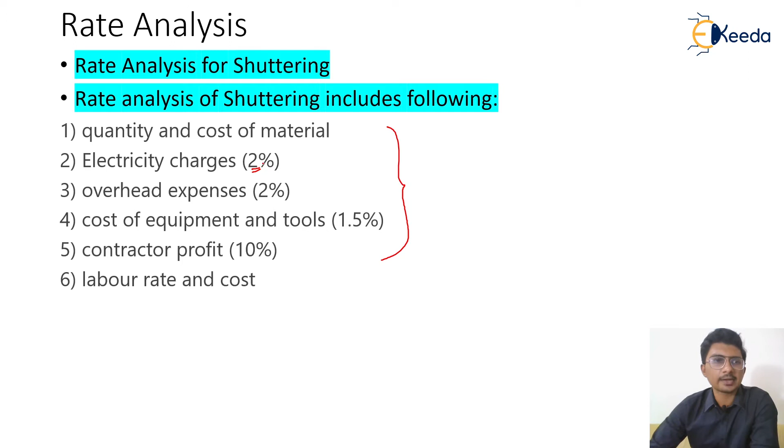Only into this shuttering one I have added the electricity charges as 2%. The water charges are not there, but we need electricity for the cutting of the battens, cutting of the plies, and a lot of cutting is there when it is about the shuttering. So for that I have added the electricity charges instead of the water charges by 0.5%. So this is what we are going to calculate for this rate analysis of the shuttering.

So now let's consider the problem statement. We have to calculate the rate analysis for the 10 meter square area of the formwork. And before starting this rate analysis, we should know what exactly the repetitions are and why more emphasis is always put on them when it is about the shuttering. The repetition is another very important topic to have in hand.

So what is that? Whenever you purchase a ply, of wood, or it might be of steel MS plates or anything, they always have the capacity that you can use them once, twice, thrice, and at least 4 to 5 times is the repetition life. So the repetition life obviously depends upon the usage you are going to have. If you are using it for heavy and hefty works, and the workmanship is not good, the repetition is obviously

going to get deteriorated. But if usage is nice, the proper application of the oil has been given, during the de-shuttering process it has been properly de-shuttered, and they are stacked in a proper way, whatever nails there are are taken out in a proper way, and the battens are separated and rearranged in a proper way. So if good workmanship is there, then the repetitions of any formwork can increase many times. But if the workmanship is poor, it can reduce to 50% or even 75% based on the workmanship.

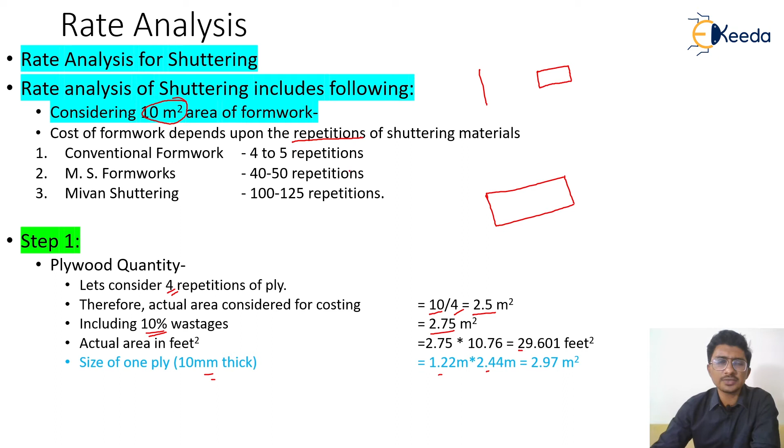Okay, and just for your knowledge, the size of one ply is 10 mm thick, which is 1.2 by 2.4 m, 1.22 by 2.44. That nearly goes to 2.97 meter square. Just for your understanding, we are not going to need this value for the calculations.

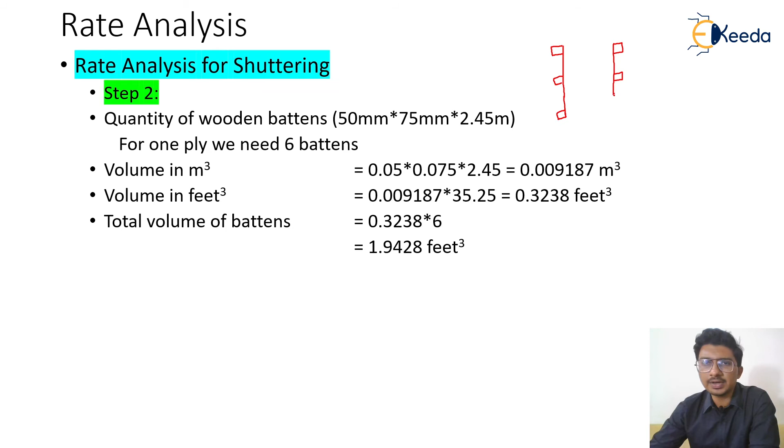The next one is the calculation of the wooden battens. Now, what are the wooden battens? Suppose this is the beam I'm going to cast, and there has to be some support that I need to give to the beam based on its depth. So these are the battens which are made up of wood, and they are measured in quantity and volume. The wooden battens are 50 mm by 75 mm by 2.45 meter.

This is a wooden block, you can say, which is of this height, that is 50 mm by 75 mm, and this length is nearly 2.45 meter. That is quite long. Around 2 by 3 inch and 8 feet, they are having this length. So now for one ply we need 6 battens. As I have told you, to fix one whole ply we need to have 6 battens.

So their volume, if we want to calculate in meter cube, we get this 50 mm by 75 mm by 2.45 meter. Then if you want to convert into feet cube, we have a multiplier we have been using for long, 35.25. Value comes to be 0.3238 feet cube. So now we are going to need the 6 battens, so that's why we are going to multiply the value by 6. The value comes out to be 1.9428.

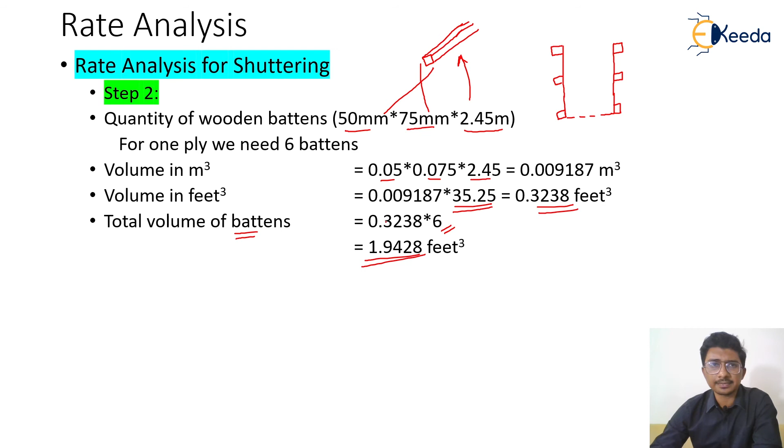So now why am I converting these to feet square and feet cube? Because whatever rates we have are most of the time available in feet only. So that's why I'm converting this to feet units. The next one, we are going to need nails, 2 to 3 inch. Now these are some of the quantities: nails, shuttering oil, and binding wire. These quantities are based on thumb rules; they're not hard and fast that you're going to need this much.

Obviously they depend upon the workmanship also, how the workers are effectively utilizing that, but I have considered between the minimum and the maximum ones. So I have considered an average value, so with any kind of workmanship, at least this much of value you're going to have. So let us go for that.

So for nails, for fixing those plies and battens together, we generally need 250 grams of nails for 1 meter square of formwork. Our area is nearly 2.75. So that's why we are going to need nearly 687.5 grams, nearly about 700 grams of nails.

The shuttering oil: 1 liter of oil covers nearly 30 to 40 meter square area, based on workmanship again. So we need to be sure about how much oil the laborers are going to use on site. Okay. The next one is binding wire.

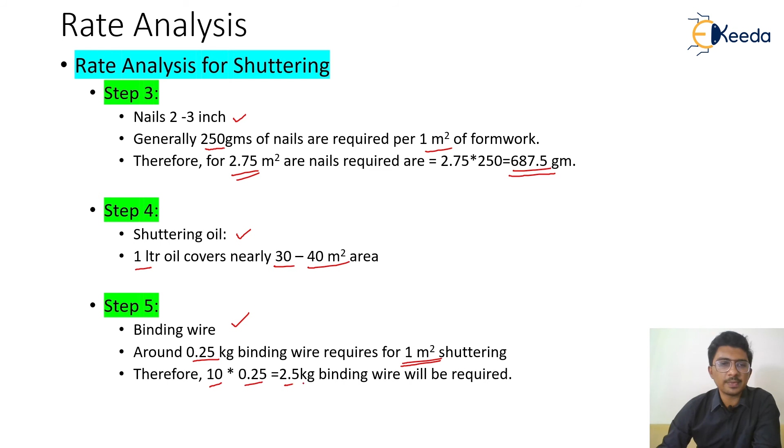Binding wire: nearly 0.25 kg binding wire is required for 1 meter square. Why do we need a binding wire? In some cases we need to fix battens together along with the nails, so for binding them together we have to use a binding wire. So for 1 meter square of shuttering, we are having 10 meter square of shuttering area, so 10 into 0.25, that is equal to 2.5 kg of binding wire will be required.

So now what exactly will the cost of material be, what are the various materials we are going to have? There is plywood, then wooden battens, support and battens, then nails, shuttering oil, and binding wire. So now we know about this batten. What exactly is support and batten?

In case of the column support, suppose we need to give some support from either side, we have to hold the column on either side with the help of these things. For beam also, for foundation also, we need to give support, so that whatever concrete I am going to pour into this cannot give a thrust and topple this out. For that, this support is the quantity considered in point number 3. So now the quantity that we have calculated I put over here.

Now the support and battens quantity is based on the plywood and wooden battens that we are going to use, and they are around 10% of both of them together. So this value plus this value, and 10% of that, is around the value of the support and battens. The nails are available in kg, and for the quantity that we have calculated, their rate is around 50 rupees. So the quantity comes out to be 34.375.

Shuttering oil is nearly 80 rupees a liter. As I've told you, 30 to 40 meter square area is covered. We are using just 10 meter square area, so 1 liter of oil will be more than enough. We will have spare oil with us. Then the binding wire, 2.5 kg, we are going to need. 50 to 55 rupees is the cost. That goes to 125 rupees. So the total material cost goes to be 4,555 rupees nearly.

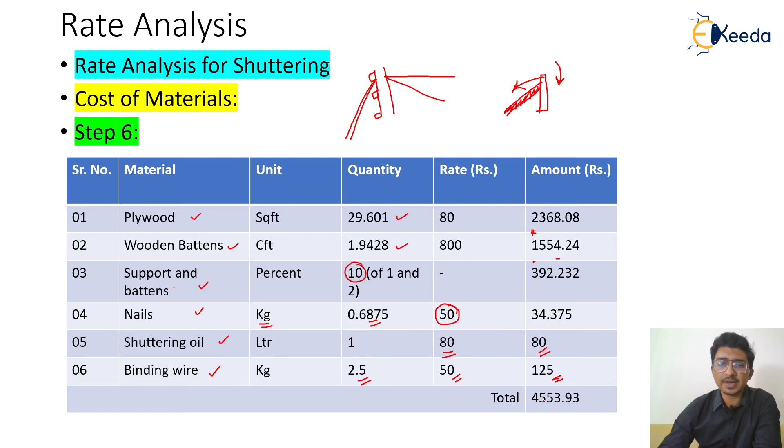Next one, we are going to need a carpenter and a mazdoor. So now we need to understand another concept, wherein these are the multipliers that I have taken from the IS code that we already have discussed, and this is the quantity that we are going to deal with. Up to now we were dealing with the quantity of 1 meter cube of PCC, 1 meter cube of RCC, and so on. But now we have taken 10 meter square of shuttering. So that's why I am first multiplying the quantity by that constant.

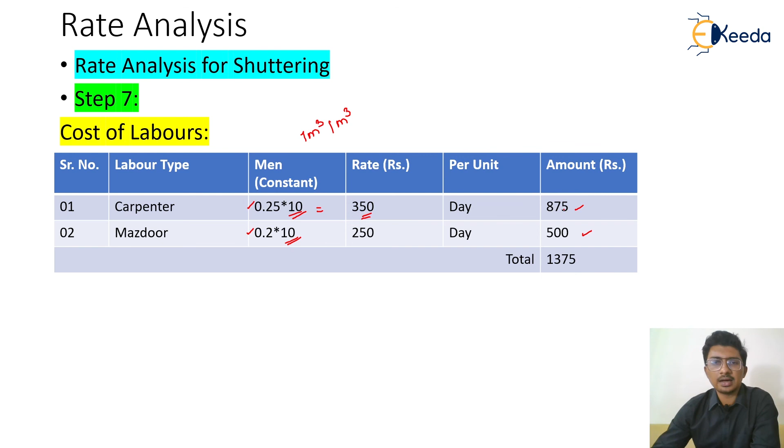That will ultimately give me the number of these people I am going to need for that amount of shuttering, and then just by applying and multiplying this rate, I get the total required. So 1375 rupees will be required for the cost of the labor.

So now the last sheet, same as the previous one, we are just going to add this labor cost and the material cost together, and based on these two I'm going to add electricity charges. Only 2% changes are there, other costs are same as the previous ones. So how we do that, let me tell you again. The first one is the water and electricity charges, which are 2% of the first cost that we have got. Then we add that cost to this cost, so we get the subtotal including water and electricity charges.

Then the next cost is with respect to 5928.93 only, this cost. So how am I going to do that? To calculate this value, I have to add these two plus this value to get the next value. Based on that, we just repeat the same, and ultimately 6,850 rupees will be required for the 10 meter square of area for the shuttering, and this is how the analysis is done.